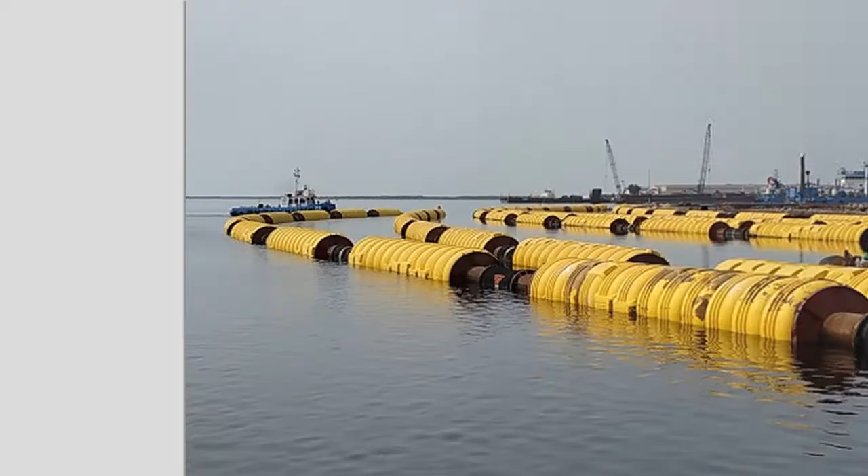KIASMA is an Italian company specialized in the dredging, marine and oil sectors with more than 40 years of experience and an iconic portfolio of projects in the world. KIASMA is the leader in choosing dredging pipeline solutions. Strategic partnerships, international culture and local presence around the world give shape to its global footprint.

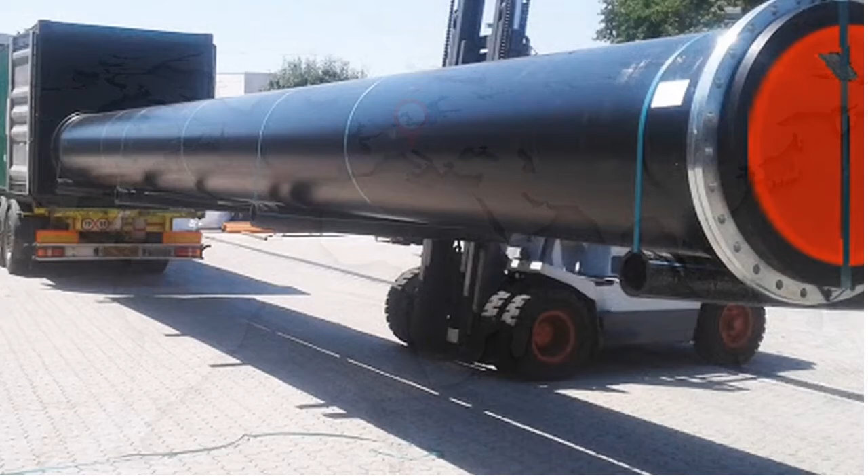We are your partner. Private companies, port authorities, ministries and governments in 76 countries in the world trust us for the purchasing of discharge lines for the transport of dredged materials. KIASMA Group is redefining the investment perspectives to obtaining investment benefits and good results until the purchase is qualified not as a commodity but as an asset.

We constantly strive to become a global E.P.S. providing solutions and managing discharge lines in the dredging sector. The group is also committed to spread technology, engineering, setting itself as an example for everyone in the sector. It is committed to a sustainable environment by providing environmentally friendly solutions and technologies for materials recycling and for the product's safety. Our employees are our most valuable resource, constantly giving them trainings.

We are committed to provide quality services and products in all of our business activities, ethics without compromise and environmental awareness. We are committed to support the environment in a sector where goods manufacturers must meet global demand for recycling and disposal. KIASMA's proven leadership is able to lead with integrity, competence and creativity. This allows us to improve continuously, our responsibility being an example for all the others.

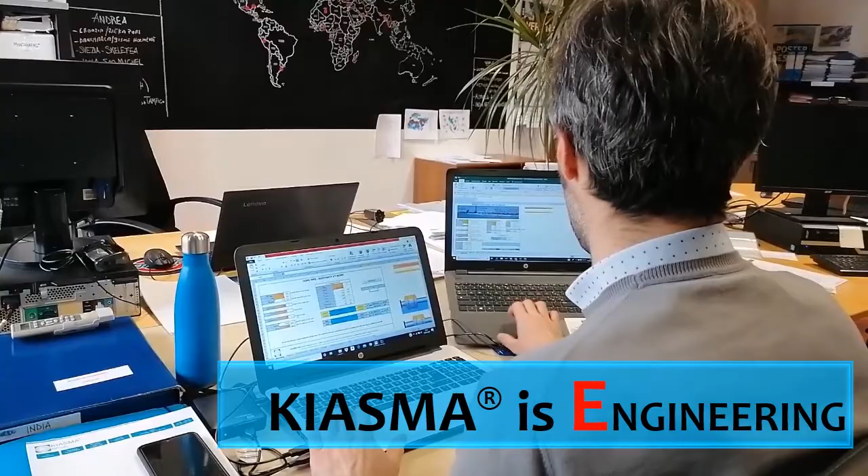KIASMA is engineering. Highly qualified engineers are working on thousands of projects in worldwide locations. They are fully qualified to optimize all project aspects until the definition of the best dredging solutions. We hold seminars, raw material, hydraulic calculation, hydraulic and mechanical calculation with software CFD analysis, FEM analysis, around the world.

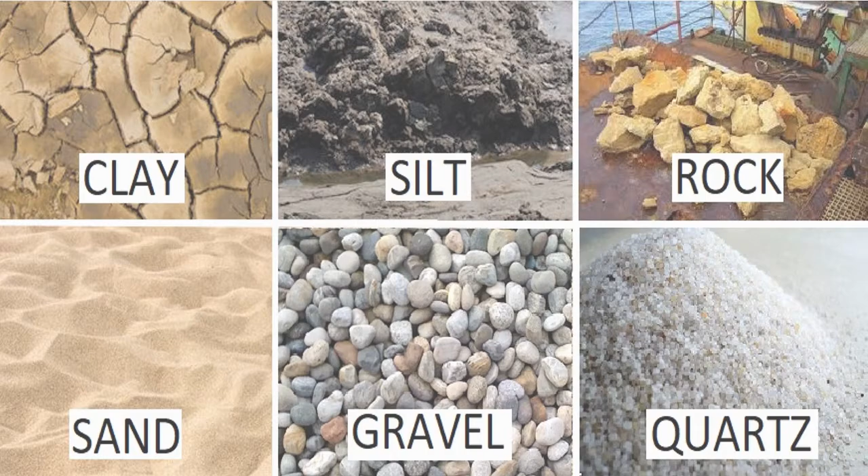Starting from the analysis of the sediments that are present in the dredging site, KIASMA identifies the type of pipes that offer an advantage in terms of costs and benefits. The project passes through the profitability index, cost estimation models, for the detection of the MOL, gross operating margin, giving our clients the opportunity to evaluate the EBITDA, earnings before interest, taxes, depreciation and amortization.

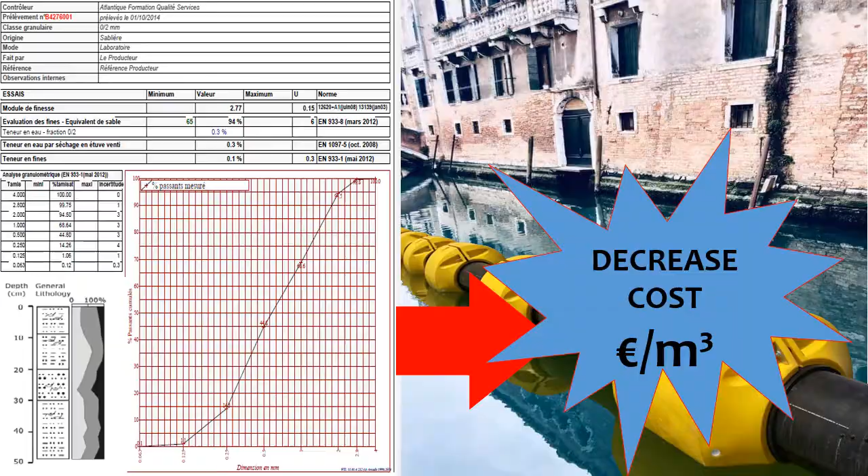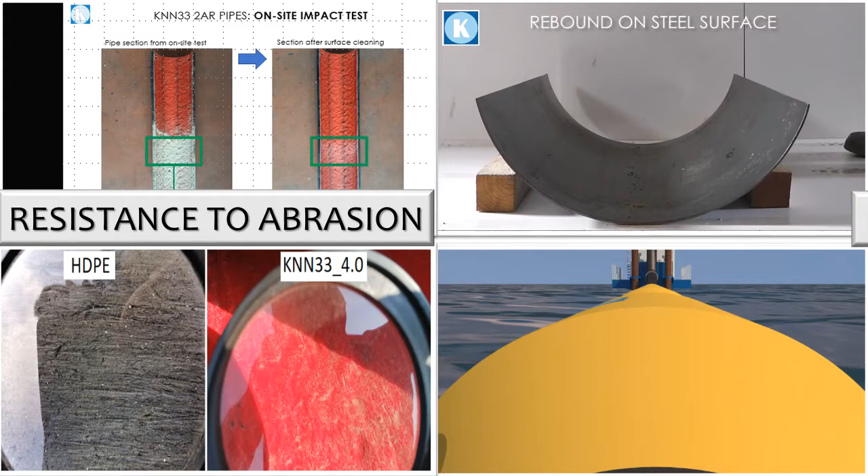KIASMA's ultimate target is to decrease the cost per cubic meter of the discharge line. It is constantly striving to introduce the latest technologies in the dredging discharge line by scouting new technologies. The chemical, physical properties and the mechanical characteristics of the raw material used for the production of the materials are: resistance to abrasion, resilience, resistance to laceration,

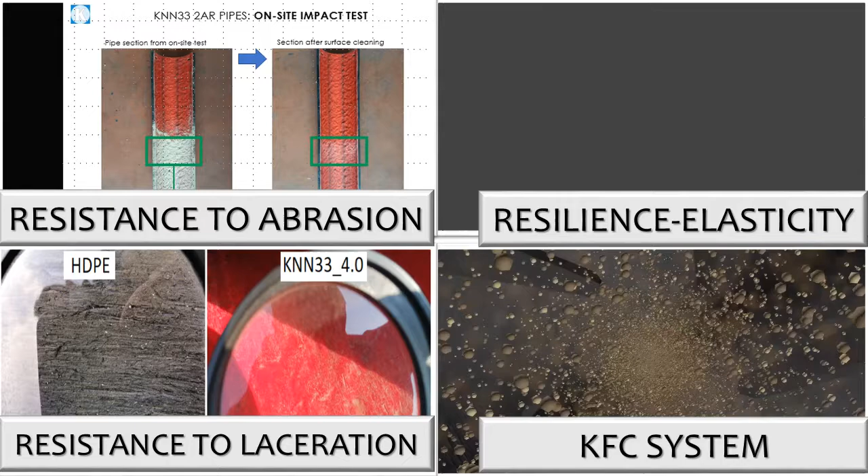flow motion. The KFC system creates a rotational motion of the inert inside the pipe, Reynolds number 200,000. There is no need to rotate the pipes. Abrasion decreases by 20%. KNN 33 4.0 type, thickness of the anti-abrasive layer, and junction type are studied by KIASMA engineers for each project. All the materials were tested together with the University of Padua and the results are confirmed by a public body.

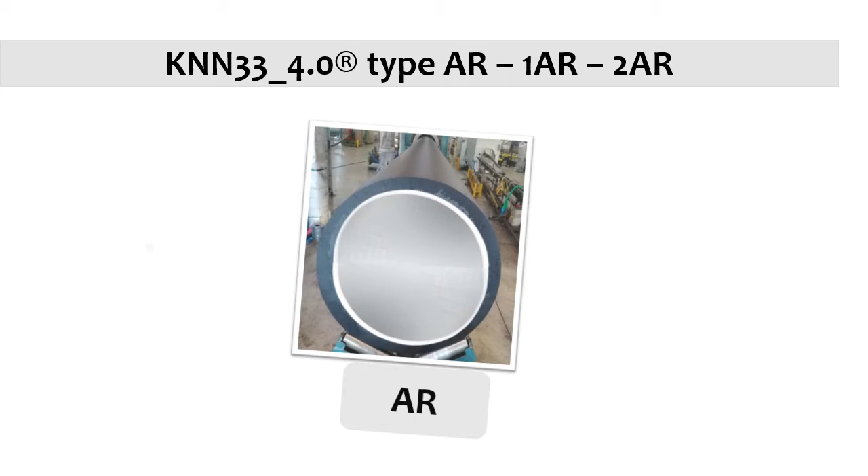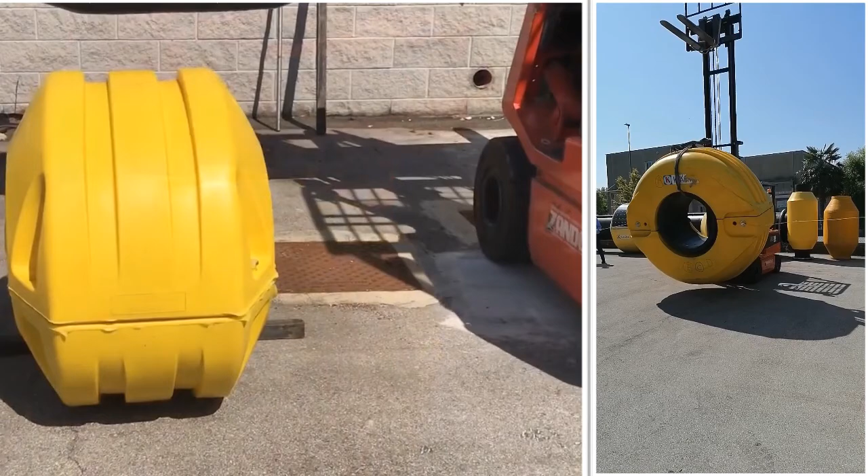With the aim of optimizing the profitability of the dredging companies, KIASMA has developed 3 types of compounds that can be used according to the type of inert dredged. The same raw material is used for the floats. KNN 33 4.0 elasticity allows the float to absorb shocks and return to its original shape.

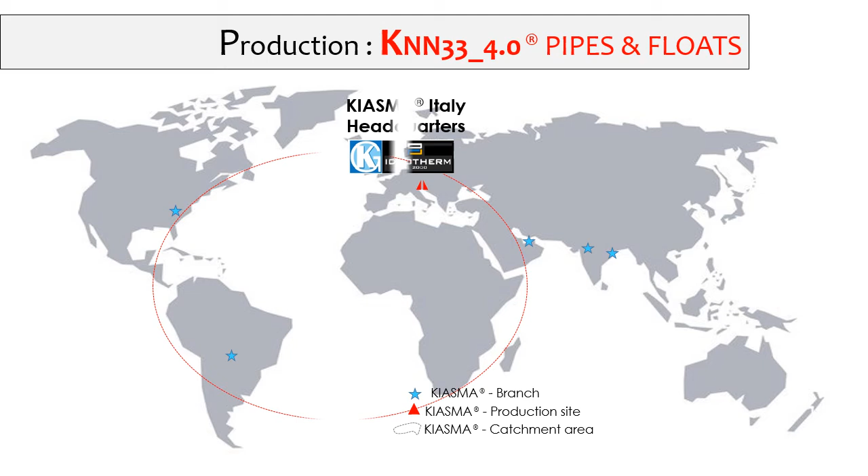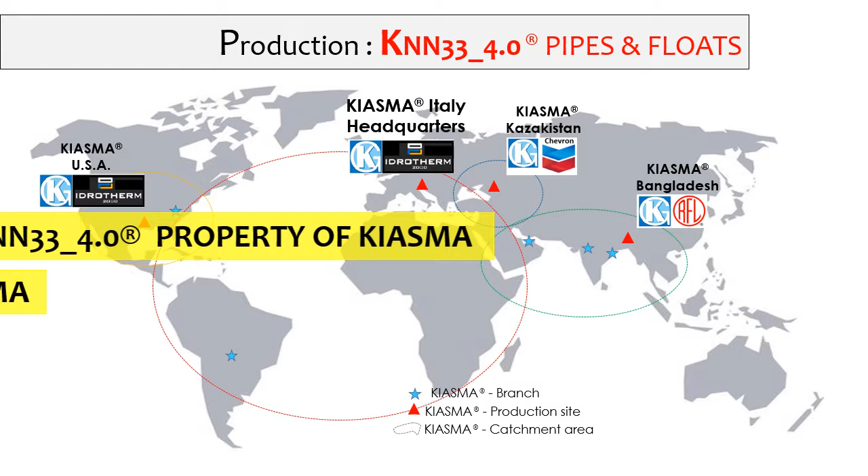KIASMA is procurement. The global management of KIASMA Group is supported by regional offices strategically located in the Middle East, Asia, Latin America, USA. In addition to the production units located in Italy, KIASMA Group has outsourced production in Southeast Asia, India, North Asia, USA, to international production companies. Through this complex network, KIASMA effectively manages hundreds of projects a year, cutting costs for duties and transport.

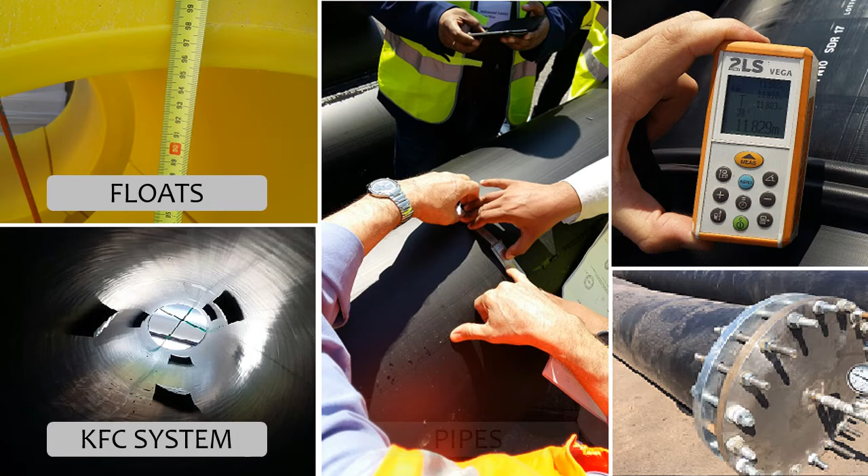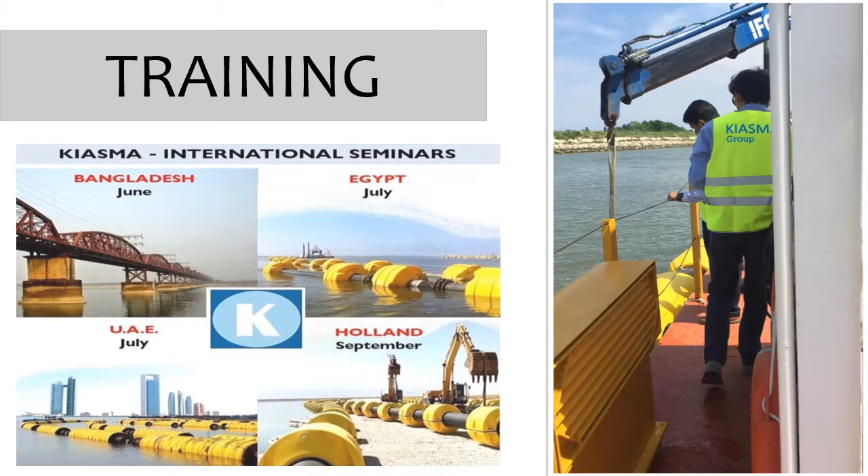Pipes and floats undergo strict tests done by the KIASMA Quality Department, in line with the quality management and quality assurance standards imposed by the international standards regulations. KIASMA's operation division is developed in 3 different divisions: training pipes, welding pipes and floats assembly. Attention to the customer is for KIASMA the cornerstone of the correct application of the initial design. The post-sale service is essential for us.

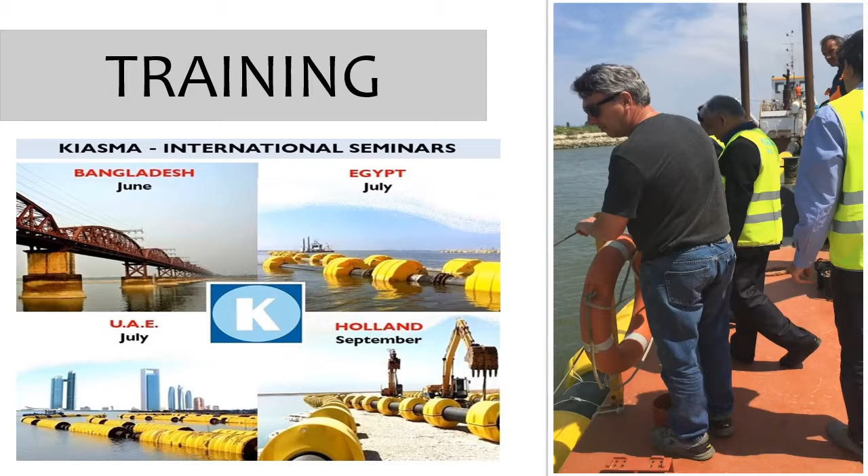Technician trainings are constantly performed to bring knowledge to operators in the sector on the use of the technology used in the dredging sector. The KIASMA teams are made up of fully self-sufficient specialized technicians, able to work in compliance with international standards, with their own and local means, in compliance with budgets and benchmarking. The reliability recognized by many public and private companies in the sector, the strategic partnerships of KIASMA, the international culture and the local presence in offices all over the world give shape to a global footprint.

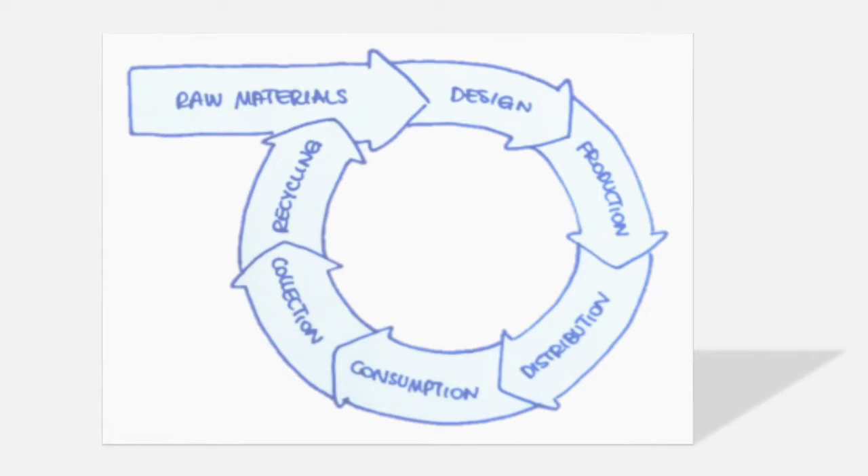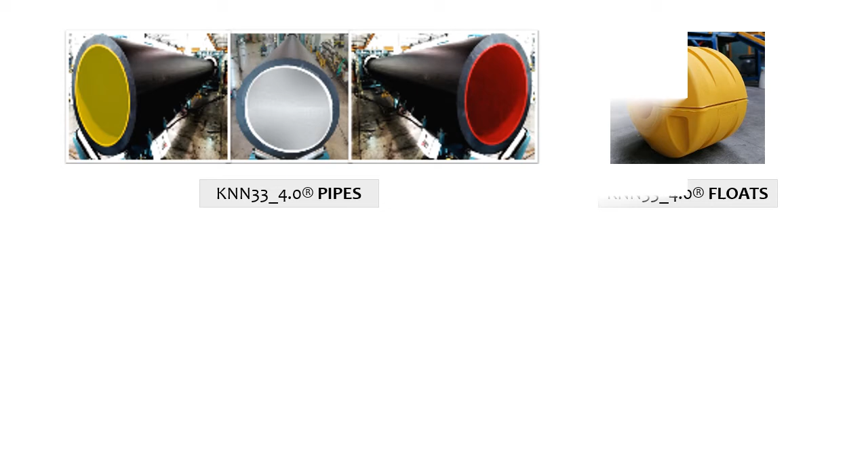The European Green Deal establishes an action plan aimed at promoting an efficient use of resources, moving towards a model of circular economy, restoring biodiversity and reducing pollution. KIASMA seeks to transform linear production systems into circular systems, incentivizing the recycling of materials. In the logic of circular economy, the KIASMA materials are designed so as to predict from the beginning their recycling. KNN 33 4.0 can be successfully recycled.

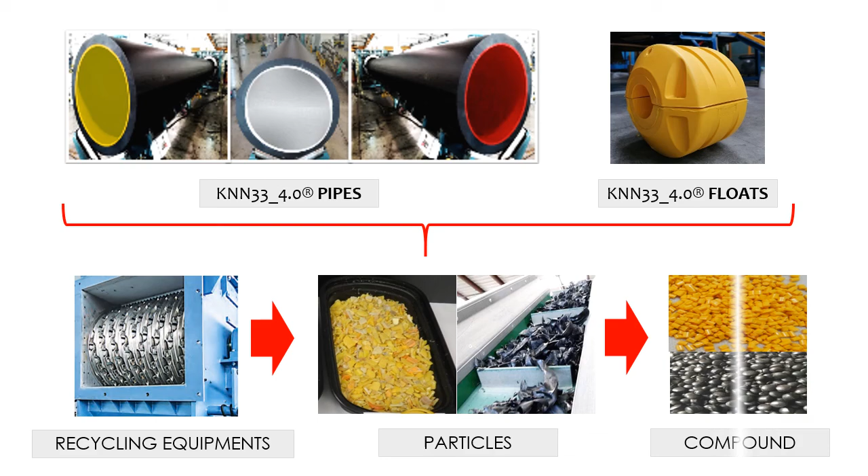The recycling process consists in their fine shredding and the formation of new granules that can be used in the molding of new products. Through this intricate network, KIASMA effectively manages hundreds of projects a year. There is no future without technological progress.